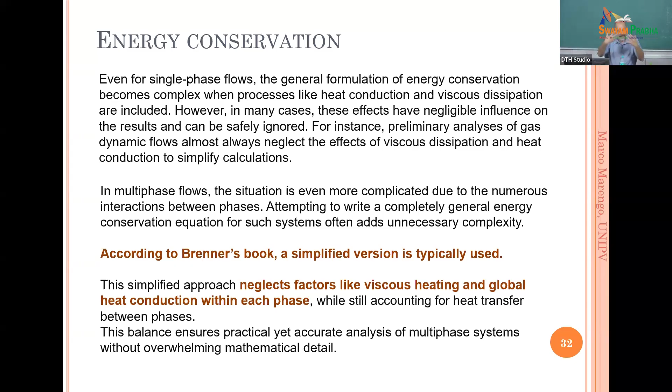So, when we have evaporation condensation, this means that when we have evaporation, we are going to transport energy with one component to the other one, right? Because we have a mass. We transport momentum, but we transport also energy. So the things are fine, but also we should consider other factors, because we said about the viscous dissipation. So one component is acting and producing shear stresses on the other component. But this is viscous dissipation, means also viscous heating. Okay? This is becoming complex.

Or we may have heat conduction from one component, from one phase to the other. Okay, so we have heat transfer from one phase to the other. It's not like we wrote before, that we have a heat flux coming from, let's say, the walls, like in the single phase. But here, bubbles may have a different temperature with respect to the liquid, or the droplets may have a different temperature with respect to the gas, and so on.

Imagine, for example, to have a spray of a liquid at, let's say, 40 degrees, 50 degrees, inside the air at 20 degrees. So we have transport of mass, we have a mass interaction term, and we have energy because of the difference of temperature. It's okay? So the things are becoming, again, complicated because we have different conditions.

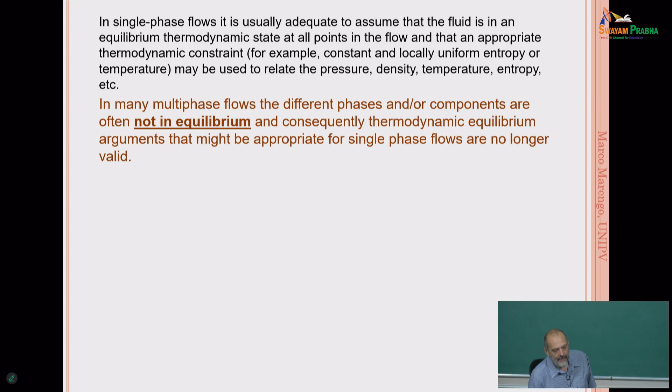So another point that is very important to say, and this is answering one of the questions during the break, is that the system is not in equilibrium anymore. So we are stretching the fact that the system should be in equilibrium. Imagine to have boiling, or a phase change in general. So you have boiling, and you are considering the system at a given pressure. Yeah, but locally, in time, the pressure is not the pressure of the system. It's changing because of the boiling itself.

So in fact, what is happening is that the system itself locally and instantaneously is not in equilibrium. We are stretching the properties in a way that, we need to define the pressure, fine, so we put the pressure. But in fact, it's quite complex, and it's becoming even more complex if you would like, for example, to simulate phenomena like flash atomization, as I said yesterday, with negative pressure, and so on. So it's becoming really complex what is happening.

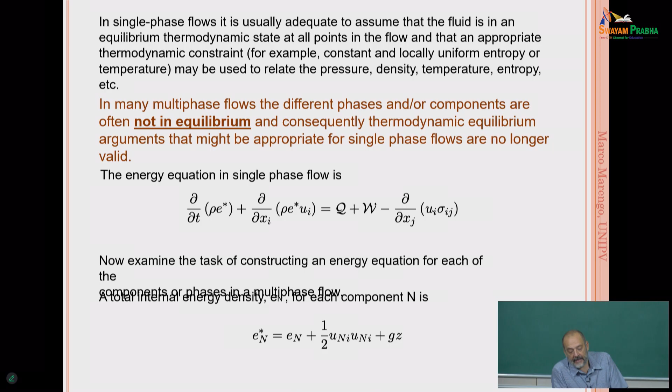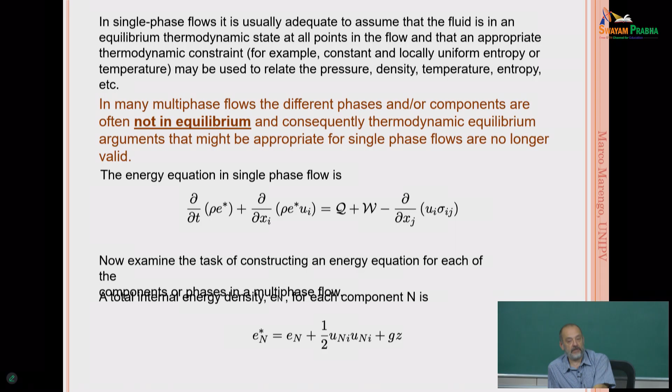So, if you look at the energy equation in a single phase, this is what we have done before, okay? So, first of all, we need to write this equation for when we have different components. In the case of different components, we have a component n, and we can write the total energy, of course, with the subscript n. That is saying that we can write this equation for the component n. Until now, it's fine. Which kind of energy equation do we need to write? Okay, so in words, and then we need to translate into mathematics.

We have the rate of heat addition to n from outside the control volume. What we have done before. So we have a wall that is heating the liquid or the gas, or both. In this case n is one of the phases. Then we have the rate of work done to n by the exterior surroundings. Gravity, external forces, fine, no problem. Rate of heat transfer to n within the control volume. This is becoming a little bit more complex because it depends on the other phases. Plus the rate of work, not heat anymore, done to n by the other components, because we may have drag. So then this is becoming complex.

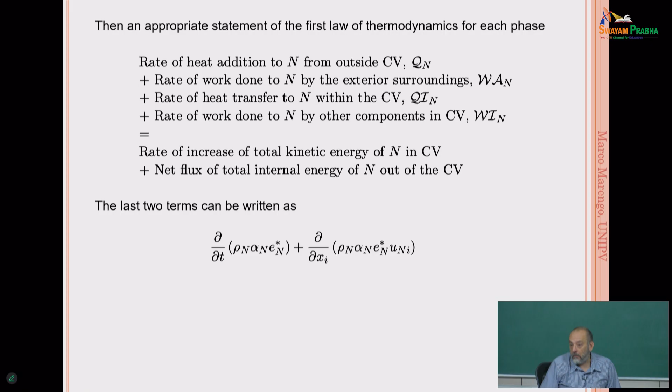And this is equal to the rate of increase of the total kinetic energy plus the net flux of the total internal energy, because of course we are going to change the condition in terms of the energy. So these terms are very clear. We can write the last two in this way if we consider the component n. And this is straightforward because it's the same equation that we have for the single phase, only that it is for one component. The other one is a little bit more complex.

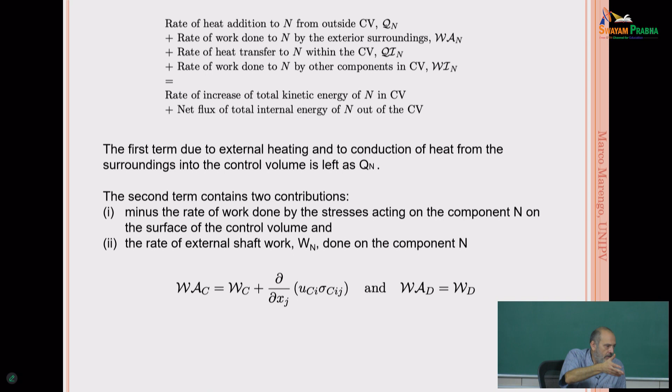The first one is the external heating. Not difficult, it's a Q. It's a power that we are giving to the system. The second one is the work done to n by the exterior surroundings. Yes, it's okay, but then we are going to have stresses along the component, which is fine, and maybe we have the shaft work. But again, this is classical. We have the shaft work plus the stresses, sigma. So again, it's something not unusual, something that we can understand.

Then we have the three contributions that may be trickier. One is the heat that is coming because of the evaporation, boiling, condensation, so it's linked to the mass interaction term, QIN. And then we have the stress, the viscous dissipation due to the other component, and we are calling WIN. Okay? And then we are going to have all the stresses of, let's say in this case, the

continuum phases. Okay? So, of course, again, as we have done for the mass, the sum over all the components of QIN is equal to 0, because inside the control volume, the liquid is giving energy to the gas, and vice versa, but at the end, this term must be 0. Same thing for the work, and of course, same thing for the internal exchange of energies.

If we have a two-phase system, of course, one contribution is just equal to the other one with the minus sign. So what the liquid is receiving from the gas is equal to what the gas is receiving from the liquid, and so on. So at the end, if we put all together and we sum up, we are landing with this combined phase energy equation, okay? Which is the equation that is saying how it is working with more than one component.

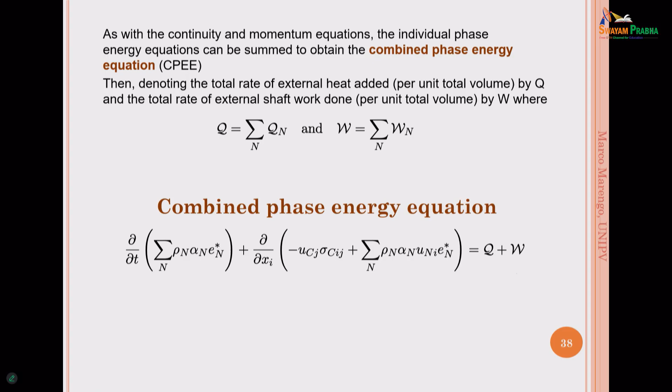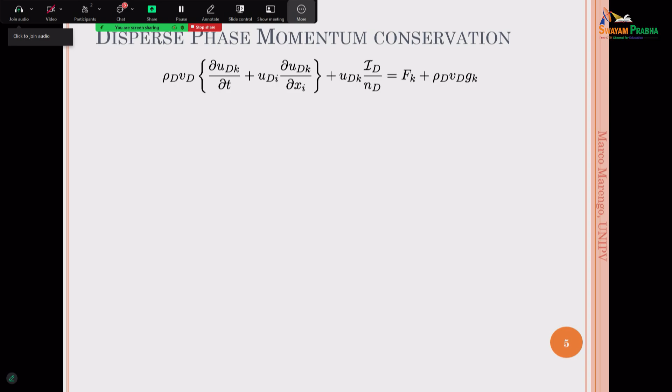Let's pass to the 2, because now we need to enter a little bit more. So, look at this equation. We already said something that is very important to define the forces, okay? Someone asked me during the break, how is the force? How is the coupling between one component and the other, okay?

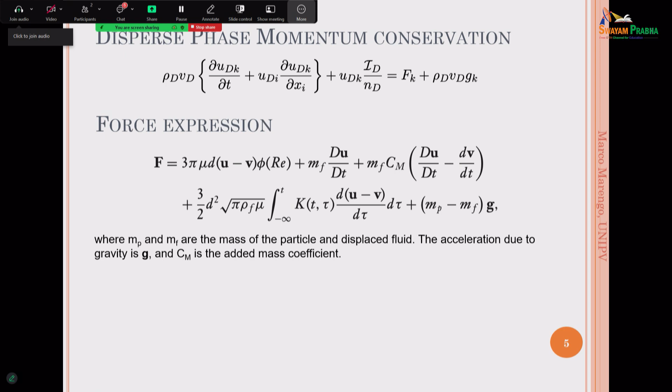This is a classical force expression, for example. It seems, wow. The classical force expression when we have two components, okay? When, for example, particles are inside the fluid. So, what is this? It seems complex, no? Because, of course, there are many terms that usually we don't have. You can recognize at the end the bulk force, the G, the gravity, like we have written before. So no problem. But there are other terms that are really more difficult to understand.

So the first term is the Stokes drag. This is the force that is linked to the fact that we have a drag inside, as we have seen before. Okay, so for example, this is a drag felt by solid particles inside the gas or the liquid, okay? And the Stokes drag can be written in this form.

It's 3 pi mu, so the viscosity, and then we have the dimension of the particle, u minus v, multiplied by a factor that can be written, for example, with this equation that is linked to the Reynolds: 1 plus 0.15 Reynolds to the power 0.687. So this is the usual form. And of course, this Stokes drag is linked to the relative velocity of a particle with respect to the flow.

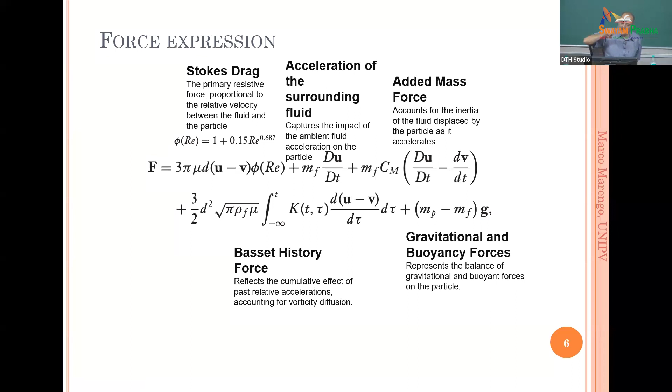And the form is that we have three halves of d squared multiplied by the square root of rho f, the density of the fluid, multiplied by viscosity, pi. And then we have an integral from the beginning, let's say, to a given time. Then there is a K(t, tau), the so-called kernel, and then there is a derivative of u minus v. So it is not like the du/dt before. It is the derivative in time of the relative velocity now. So it is the relative velocity that is creating this kind of vortex.

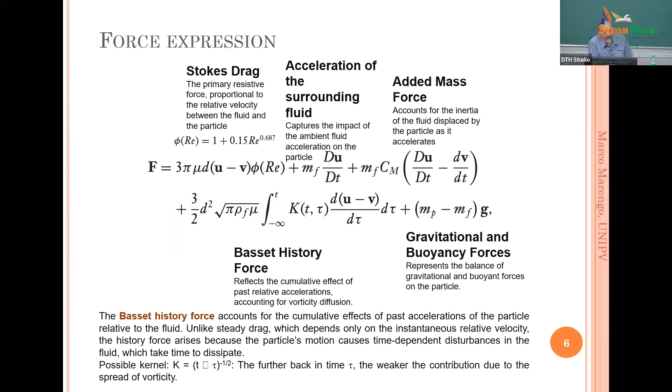One can ask, what is the difference between the Stokes and the Basset force, okay? The Stokes drag depends on the instantaneous velocity. So at a given time, you have a difference between the gas and the particle velocity, and this creates a viscous dissipation. Okay, so you calculate the drag. The other one, no, because it's not depending on the instantaneous velocity. It is the acceleration with respect to the relative velocity. So you don't have u minus v, but the variation of u minus v in time that is producing the drag.

Okay, and this kernel, at t minus tau, if you are going very far back in time, becomes very weak, in the sense that if you go back a lot of time before what is happening, the influence is very low. It's important to know what is happening maybe a few seconds or milliseconds before, not what is happening 1 hour before.

So this is about the force. Now we need to understand a little bit more about the heat transfer, okay? When you are heating up a particle or a droplet or a system in general, you have a characteristic time that is linked to the conductivity or convection, but also the thermal inertia, rho Cp of the system, okay? So this is the characteristic time of heating or cooling of a particle, a droplet, a bubble, and so on. So again, when we are transferring energy from one phase to another, we can transfer energy by conduction, convection, and radiation. As I said yesterday, we are not considering radiation, okay?

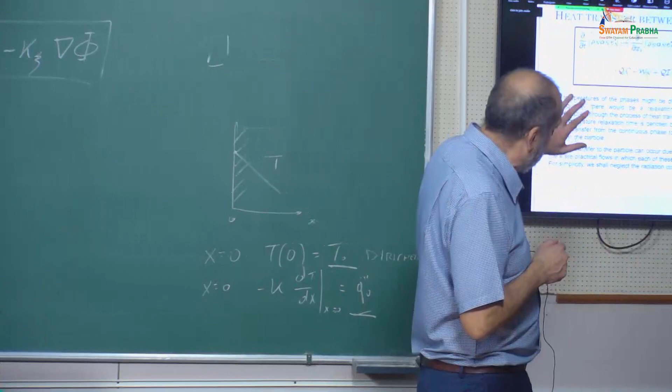If the velocity of a particle with respect to the flow, so the relative velocity, is quite small, of course the dominant mechanism is conduction. Forget about radiation for now, it's conduction. About the radiation, one can think, okay, it's only for combustion. It's not only for combustion because, for example, imagine to have very, very hot metal particles. So you produce, let's say, a metal spray, plasma spray, and so on. So you have particles at 2000 Kelvin or something like that entering the gas. Of course, the radiation becomes important, even without a chemical reaction in this case.

The point is that radiation becomes important because, depending on the gas, the gas can be transparent or almost transparent, and this means there is a transfer from one particle to another, because in different positions you have different temperatures of the particles. Understand? So the radiation there becomes very important because the temperature is very high.

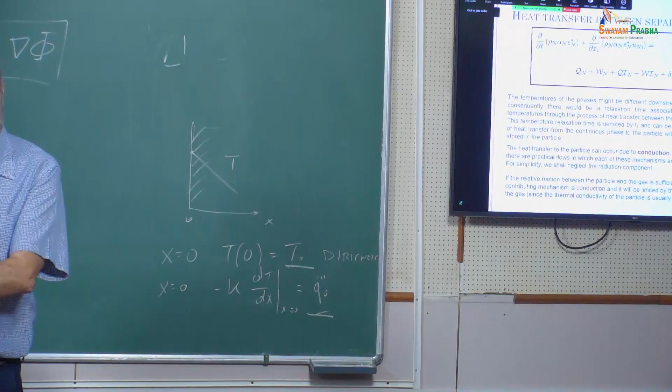Okay, only to say, because I was thinking, now I'm saying only chemical reaction, but it's not only combustion. It can be something like that also, thermal spray. Simulation of the thermal spray is considering also radiation. Now, for this, we are not considering it, because it's, again, another level, okay? And we are not considering chemical species.

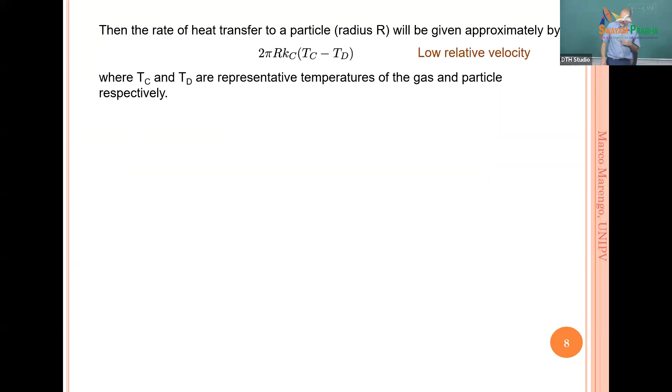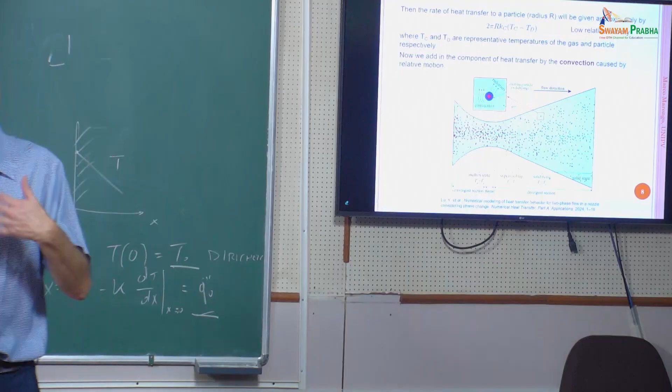But when the relative velocity is low, we can have this kind of expression that says how much is the exchange between the particle and the gas. When we have convection, things are getting complex. For example, I took this example because it's 2024, and multiphase flows are quite complex, and you see that we are doing research. It's a field of research. It's not something that is established and everything is fine.

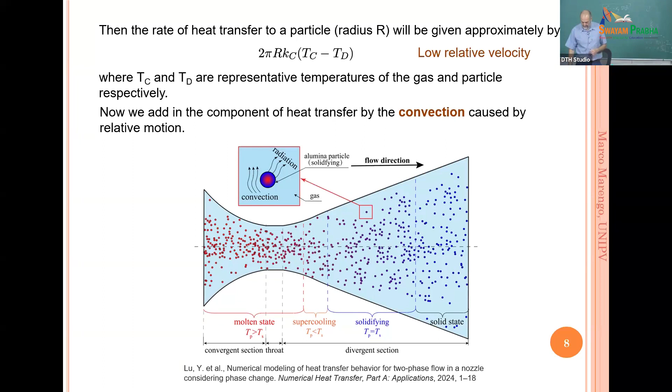So, for example, if we have a nozzle like that, and we are producing particles, and the particles are molten, are liquid metal, for example, going inside the nozzle like that. So a convergent-divergent nozzle. So we are going to have a flow, and then we have different phase changes. We can have a solidification at the end. We are producing solid particles. And of course, in this case, we have convection and radiation. Only to tell you that it can be quite complex.

So a very simple way is to consider, for example, the interaction between the droplet or particles and the gas or a liquid. And again, we can come back to the relation that I showed you before with the Nusselt number, where the Nusselt number was a function of Reynolds and Prandtl. So we can incorporate this kind of relation in order to calculate how much heat is going from one phase to another. So the equation is what we wrote before, but then we need to understand how we can calculate these relations.

Again, on Thursday we are speaking about numerical methods, and I'm going to tell you how we can deal with the different aspects, because there are different ways to solve the problem. One is considering the dispersed flow, each one, for example, when we are doing a VOF simulation of a spray, okay? So we are really going to understand at the interfaces, each one, what is happening. Of course, in terms of computational time, it is very, very long, because we need to consider the single droplet.

Another way is to consider the phase of the droplets in a kind of parcel, okay? So we are putting some droplets with the same diameter together. This is another way to solve these problems. Now, today I'm giving you the general overview. Then of course, we are going to write the closure equations, because we need to understand how to deal with the different terms. But this will be on Thursday. So yes, and then you can write this expression and so on. So the temperature relaxation time is very important. So we have different times, and so on.

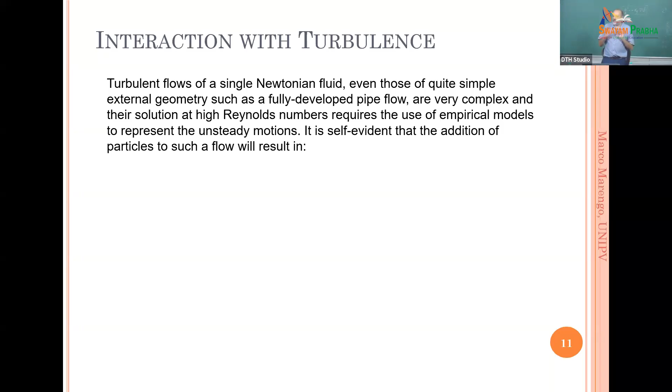Let's put away something that is too complex for this course, non-Newtonian fluids. Newtonian, okay? Viscosity is the same. Put away situations where you don't have fully developed flow, so you have a nice condition. Again, we don't want to enter into the details, okay? Good.

Because when you're dealing with complex, unsteady motions, for example, when you have a pump and you're considering variation of the rotation of the pump, so variation of the pressure and so on, you may have segregation. So the particles, as we saw before, can create structures. We can have particles that are going to the walls and so on. Unsteady motion. Particle agglomeration, or coalescence of the droplets or the bubbles. So the droplets can coalesce, the bubbles can coalesce, and so on. So it's not changing the mass of the component, but it's changing the quantity in a given volume.

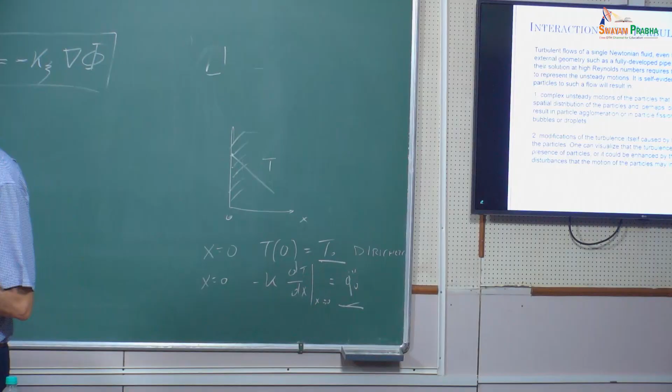Okay, so this is, of course, to consider. Okay, the particles in all the multiphase flows are having an effect on turbulence. This is the point. I said already, no? Okay. Now,

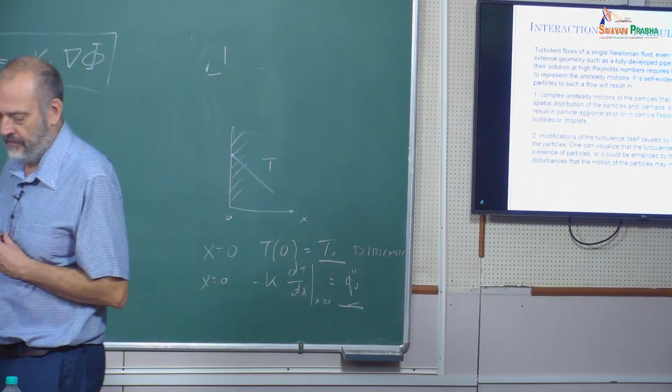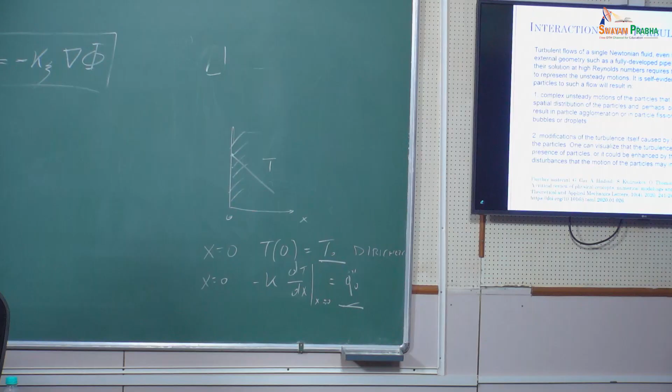if you want to study a little bit more this part, I put a paper that I enjoyed. It is particle-induced turbulence. So it is the turbulence induced by the particles. So you have a laminar flow. You put inside droplets or bubbles and so on. You are going to have local turbulence.

So you have a nice flow. But you put bubbles inside, like even a slug plug condition, like in a pipe. So you have bubbles going, everything is laminar. Wow, it's very good. Yeah, but behind the bubbles you have a wake. The wake is producing a vortex, and you may have a kind of turbulent situation. So then, of course, there is an influence.

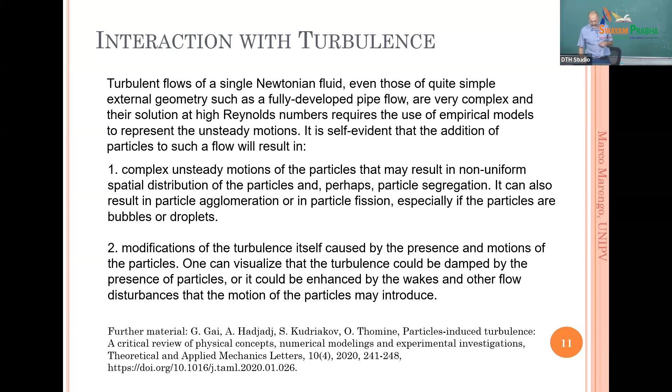Okay, so this is a critical review of physical concepts, numerical modeling, and experimental investigation. It's 2020, so it's quite recent.

So imagine a spray. So you are injecting a spray, and you have gas that is going to be entrained in the spray, because the velocity is higher here, so the pressure is lower, so you have gas from the environment that is going inside, and then you are creating vortices inside, even if the air was completely still at the beginning. So, completely still, we are injecting the sprays, we are completely changing the motion with a lot of vortices, so we are creating turbulence.

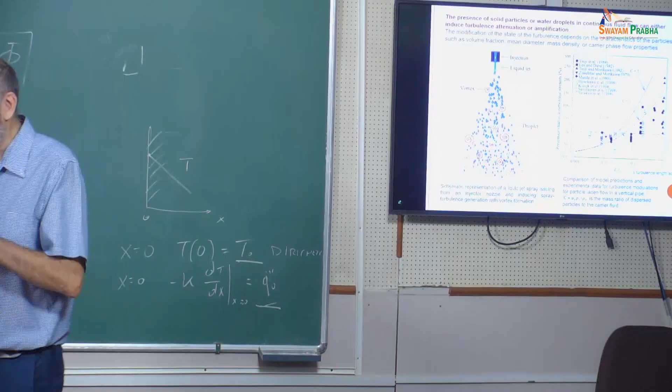And the turbulence can even, let's say, at the beginning, if it's completely unsteady, create a situation where we can change the condition of the spray, or let's say of the atomization.

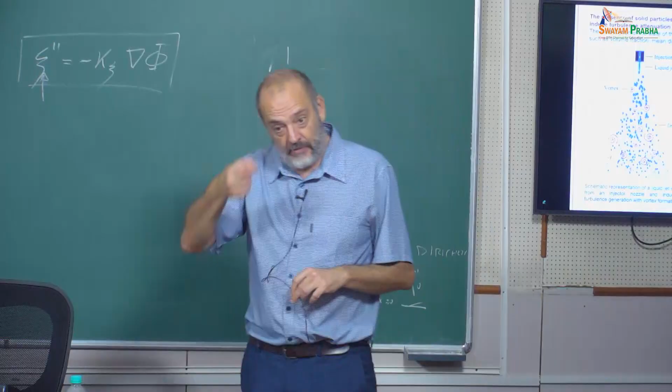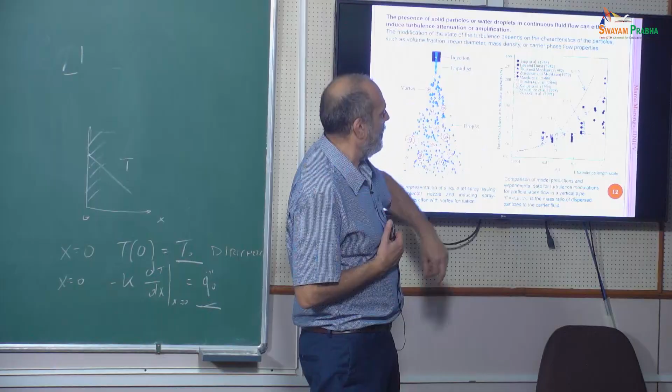And for example, if you look at the second result here, that is in the paper that I cited, this is the dimension of the particle with respect to the turbulence length scale, the lambda, no? And here is the percentage change in turbulence intensity, okay? So, as a function of alpha p rho p over rho f.

And as you can see, there are different data that are a little bit scattered. So this means that even with experiments, it's not clear what is happening. It's very complex. But it's very clear that we have an influence. And the influence is depending also on the dimension of the particles.

And even think about the fact that if the particles are not spherical, it's even more complex because we have also rotational mechanisms. So if we have, for example, sticks, strands, and so on, these strands can evolve, and then, of course, they can change completely the local turbulence again. So the system can be quite complex.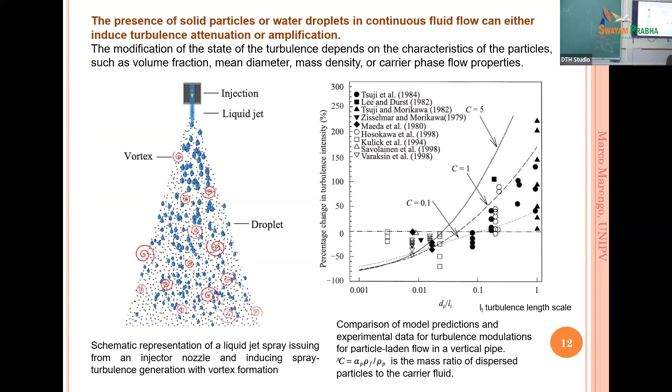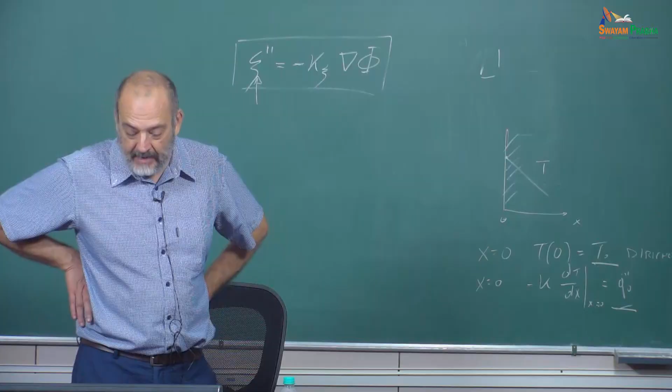So there are 5 key factors that are, let's say, explaining what is happening. One is the so-called surface effects. It is the particle size normalized by a length scale. So this dp over lt. Then we have inertial effects. So we have the different velocities for the particle and the continuous flow.

We have the response time, the particle response time, or the so-called Stokes number. Maybe I can say something later on. It is also very important, because it's the answer to a change of the flow velocity, so the acceleration. Loading effect, how much is the quantity of the particles inside, and the interaction effect, because also we have particle-particle collisions, and we have particle-wall, and so on.

Okay. LT is the turbulence length scale that can be written in terms of K and epsilon. And this is quite useful because, of course, K-epsilon, for example, is a classical model to describe turbulence in numerics, so we can use these values. Where K is the turbulent kinetic energy, and epsilon is the dissipation rate. And then there is a constant, which, for example, for the K-epsilon turbulence model is 0.09.

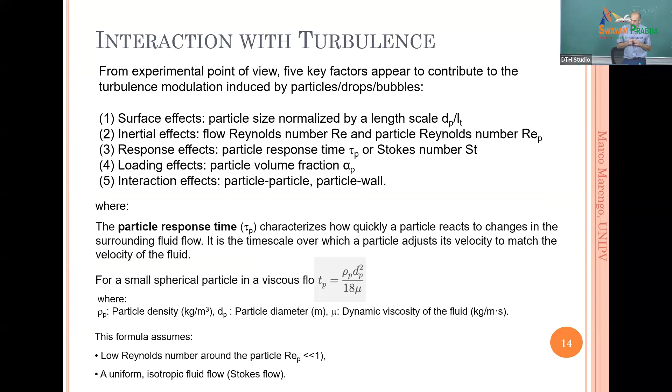The classical response time is the rho of the particle, density of the particle, multiplied by dp squared, divided by 18 times the dynamic viscosity.

Look, if we consider alpha, the volume fraction, this is an interesting graph from Elghobashi. So it's true that below a given value of the volume fraction, so when we have very few particles, very few, okay, there is no effect. So there is no significant effect. There is an effect, but it's negligible. There is always an effect. But this effect is negligible below a given value, alpha p, okay?

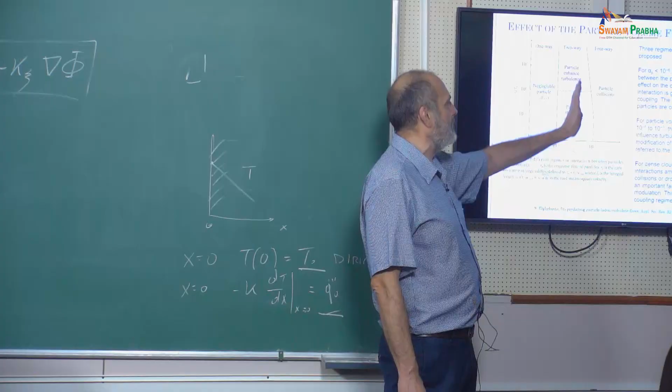After, we have a second region where we are going to have more particles inside, and we have the so-called two-way coupling regime. So, in fact, there is an influence from one component to another. However, depending on the particle response time and the turbulence time, we may have the situation where the particles are enhancing the turbulence, and the situation where they are attenuating the turbulence.

Okay, so if the response time of the particle is small, we are going to have this effect of attenuation of the vortices, because the particles are following somehow the flow. Imagine that you have some turbulence and the particles are entering the vortex and following the vortex. Since you are adding a mass to the vortex, you are slowing down the effect. You are dispersing because you are creating stresses, so somehow you are smoothing down the turbulence effect.

But on the opposite side, if the particles are going inside and they are not following, but they have a little bit more inertia, they may be stretching the vortex, creating even more vortices. And so they are increasing the turbulence level, not decreasing it.

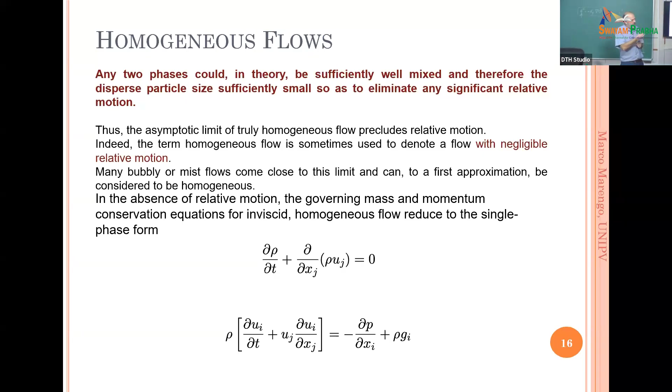As I said, homogeneous flows are very important because in this case we can treat the multiphase flow as a single phase flow, and this is quite useful. What is important is that we assume the relative motion of one component with respect to the other is negligible. What is changing are the properties, like the viscosity, and we need to put an average viscosity. Of course, if we have a lot of small particles, this changes the average viscosity of the system. But we can survive with this.

One thing that is interesting is that not only viscosity changes, but another property, interesting for compressible flows, is the velocity of sound. This is changing with the presence of the particles inside. This is the sonic velocity as a function of particles inside the system, and this is interesting to know.

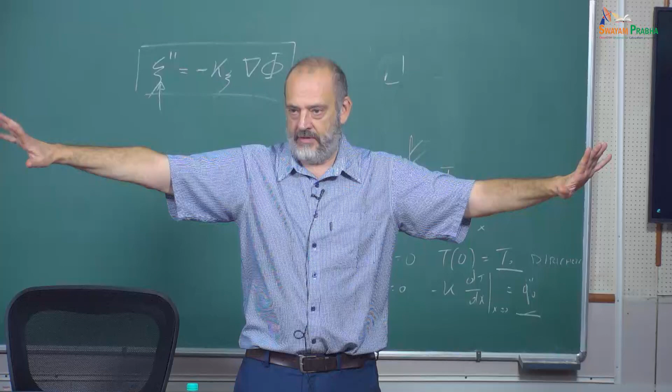But again, in a homogeneous condition, the density is becoming an average density. So in a homogeneous flow, when we have a lot of small bubbles or small droplets, a classical example is the aerosol. Aerosol means having very small droplets under 5 micrometers in a flow. They are following the flow. So we can use the volume fraction to define the average density of the system, the average heat capacity, the average viscosity, and so on.

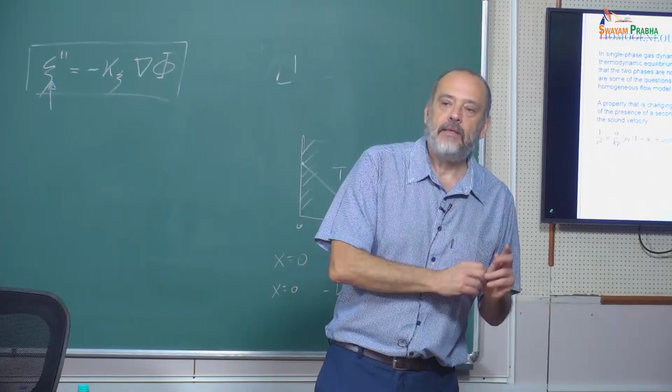In this case, even with a compressible flow, you have an average density that gives the correction for the sonic velocity. What is interesting is that the sonic velocity of a mixture is much smaller than the sonic velocity of one of the components. So if you have, for example, an air and water bubbly mixture, the sonic velocity is much smaller than for the water and for the gas.

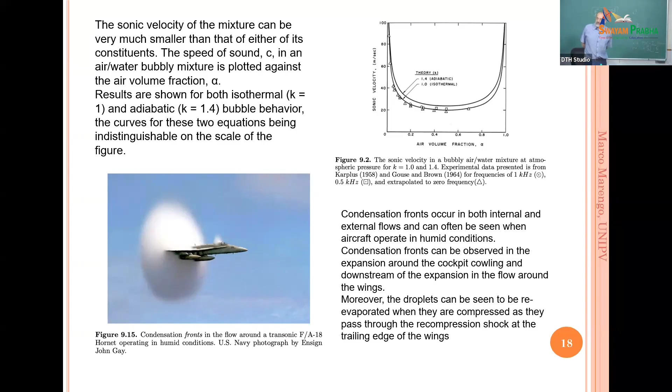And here you have, for example, a condensation front. This is a very nice image from a shock wave produced by a jet. But it can be that we are not going to have a shock wave. It's really the fact that we have a front of very high pressure, and this is creating condensation and producing droplets.

And then we have the sprays. This is a big chapter in multiphase flows, as you can understand. I'm going to come back to sprays a little bit on Thursday when we are dealing with interfaces, because I'm giving this part to you as supplementary material. But what's important to say is that we didn't consider until now the surface tension.

Of course, when we are dealing with liquid, we are dealing also with the surface tension, okay? But on Thursday I'm going to speak about that. I'm going to define the surface tension, the effect of surface tension in the flow, and how you can incorporate this surface tension inside the equations, okay? Otherwise, it was too much for today. Already with drag and buoyancy and so on, it's too much in 1 hour.

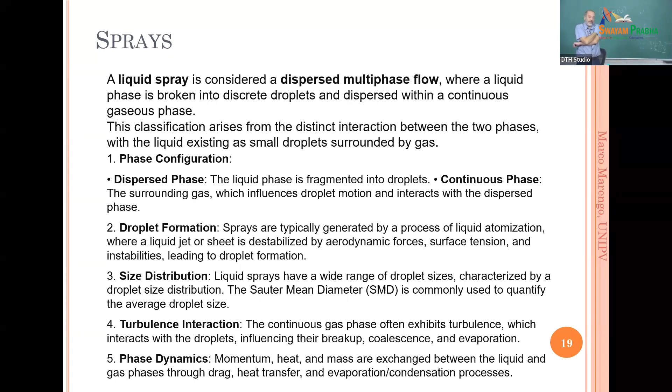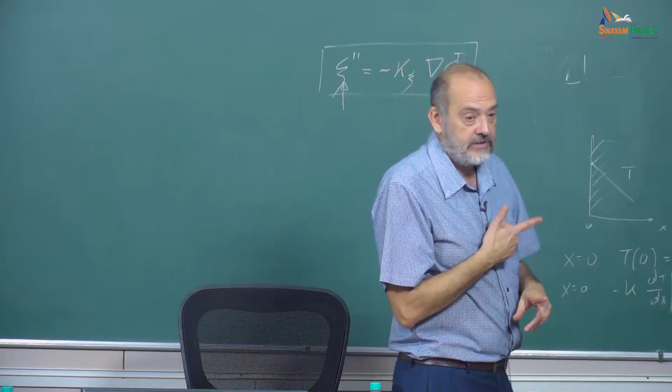So what is important is that we are going to explore the effect of the surface tension. Of course, in liquid sprays, the surface tension effects are very important, and sprays are really very complex. They are dispersed multiphase flows, maybe reacting sprays, with combustion, for example, and it is one of the most difficult simulations that you can think of. We have evaporation, condensation, collisions, we have everything. If you start thinking of a spray, you can put everything inside.

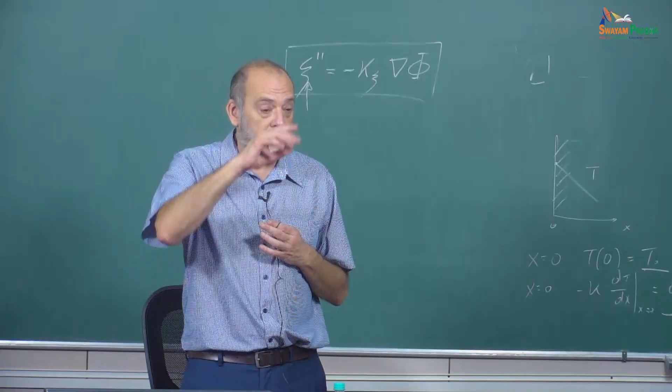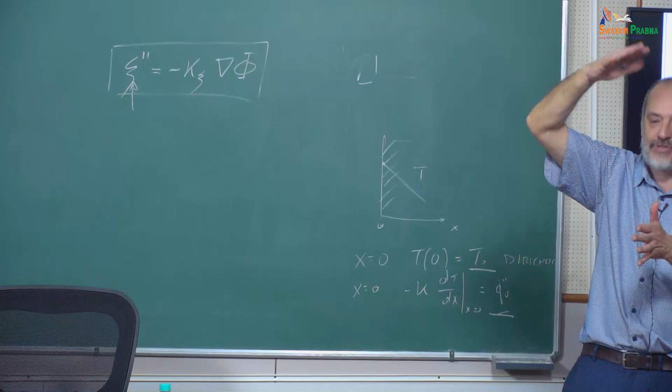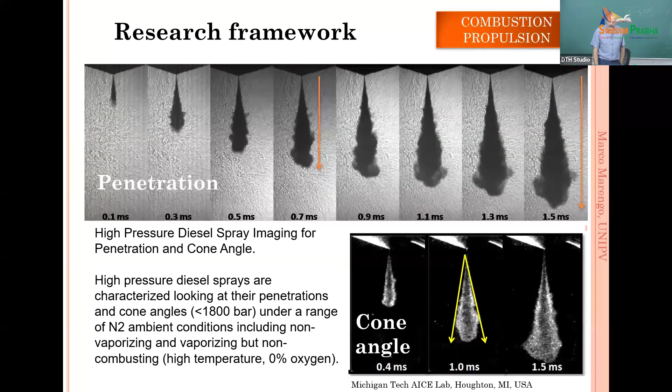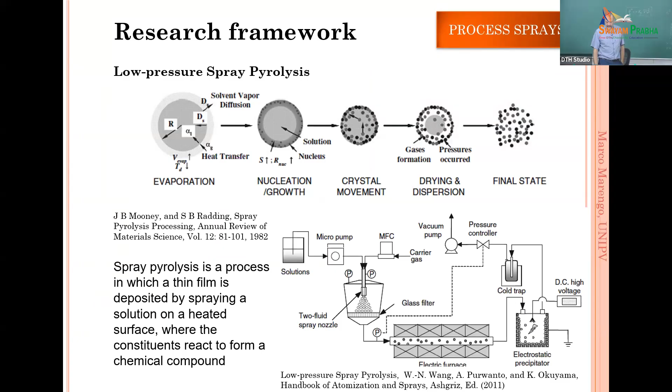And for the dispersed multiphase flows, it can become really very important. Also because the droplets may have different diameters. We wrote the equation with a D, but imagine that now we have not only one D, but a distribution of diameters in the spray. So it's becoming really very complex. But of course, it is a field that is very important for combustion, propulsion, spray drying. We have many industrial applications related to sprays, electrosprays.

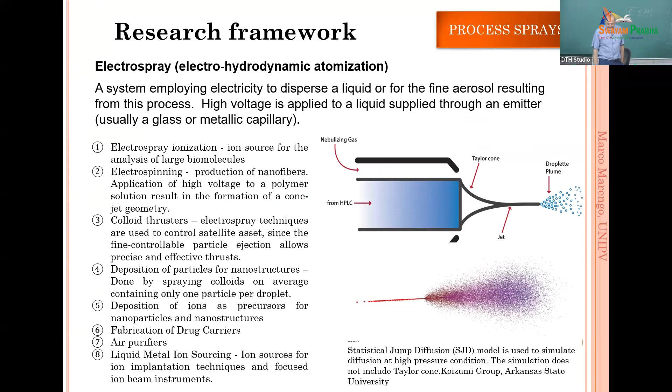Here, I put this example because it is an example at the nano level. So how to produce nanoparticles, very small particles. Painting. And here, for example, is interesting. My colleagues at the University of Stuttgart, I know them since a long time.

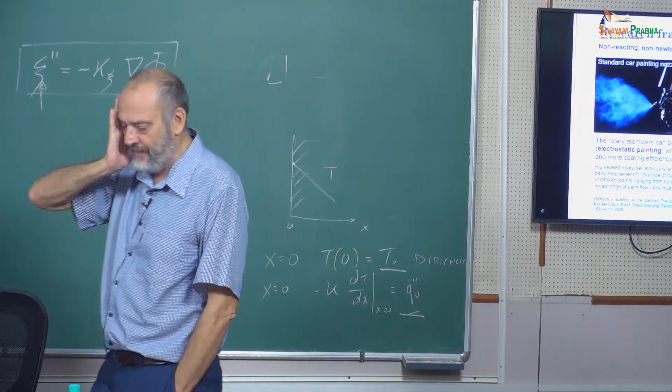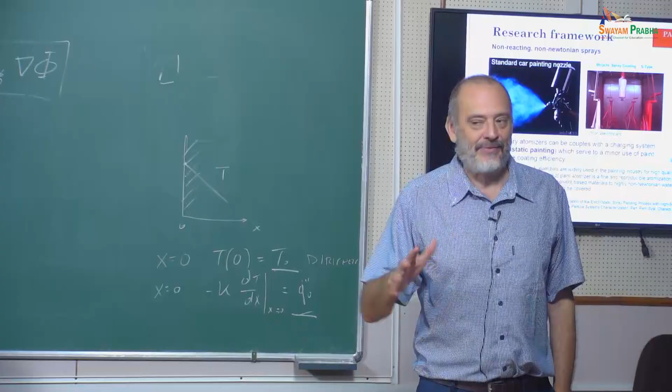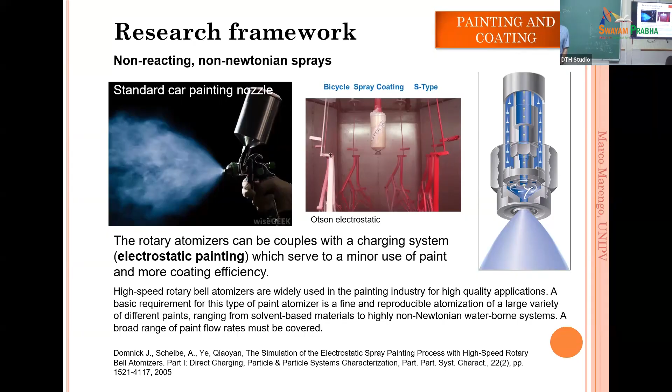And here, for example, we talked about the force. Well, we have another external force. When we're speaking about electrostatic painting, we are thinking about the effect of charges inside the spray. Because the spray is charged, we have an extra force to consider in the equations. Usually, if you consider this, then you need to simplify something else, because otherwise it's becoming too complex, but it's interesting to know. This is an example where the force is not only G; there is an electrostatic force.

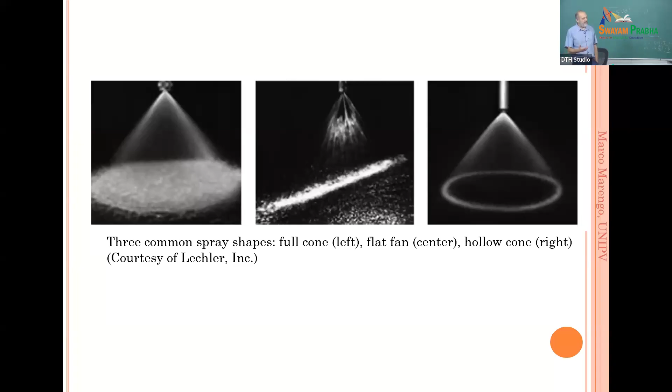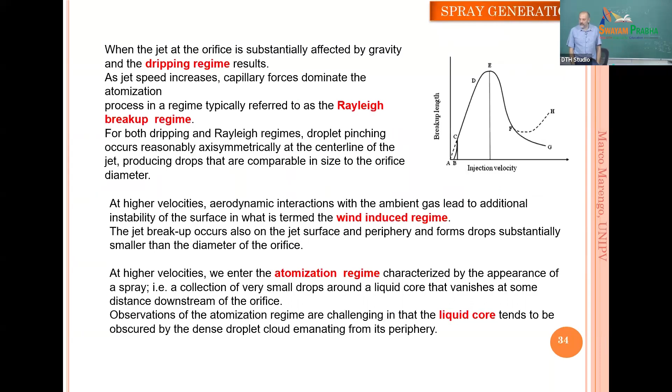Then we have pesticides, asthma sprays, deodorant sprays, and so on. And everything is linked to the fact that the physics of the primary atomization is really very difficult and complex. There is another course I'm doing, called LEADERSP, where we speak about that for 5 days. But I'm giving you these slides as supplementary material. If someone is working with sprays, it can be interesting to understand the different forms of primary atomization, velocity effects, and so on. Also, in a nozzle, you may have cavitation inside the nozzle. So again, you have another effect.

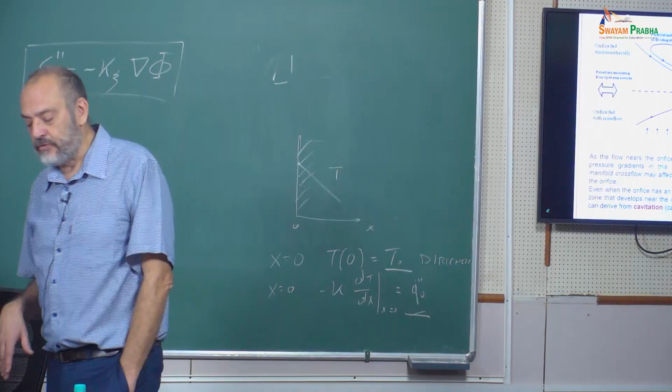And I finish with this sentence: imagine that until only 10 years ago it was almost impossible to have a simulation of sprays from the nozzle to the final effect. The simulation of a spray was what is inside the nozzle, and then we started with a given situation at the nozzle and propagated the solution to understand the cone angle, the droplet movement in space, and so on. It was very difficult to put the two things together. Now we are doing this.

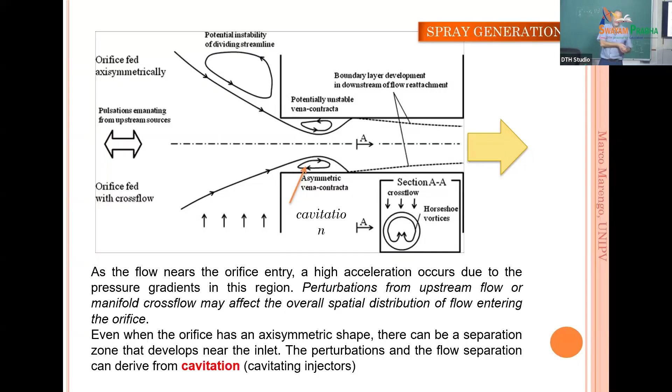Now we are able to have the CFD simulation starting from inside the nozzle, maybe with cavitation, intermittency, and so on, producing the jet at the end with a breakup. It can be an aerodynamic breakup, instabilities, and so on. But it's really very recent. We are not speaking about 50 or 40 years ago, but about 10 years ago.